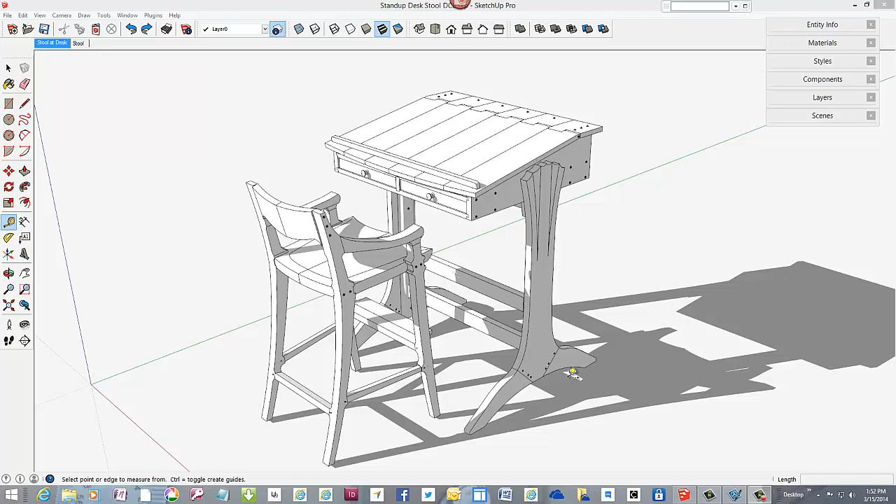I've finished construction of the stand-up desk and now need the stool to match. In this video, I'll show how I created the shaped back piece in the stool. This will involve standard SketchUp tools, including the line, arc, protractor, tape measure, and push-pull tools. Also, the intersect function is required since the back involves compound shapes.

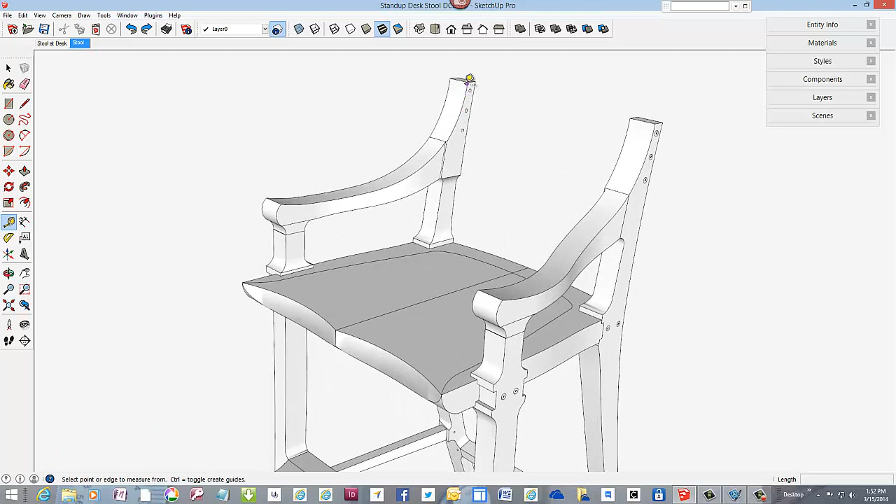Here is the stool in its basic unsculptured assembly, albeit without the back. On the upper section of the back leg, I'll place a guideline here, and this will be the front face of the back.

I need a perpendicular line to this guideline, so I've picked the protractor tool, rotate around to 90 degrees, and I've got a perpendicular line.

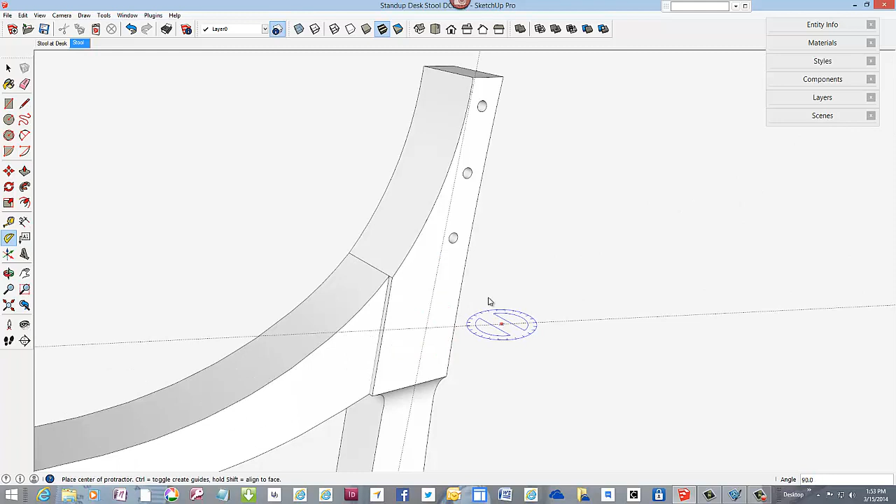Now I can place a line that is 2 inches long, which will represent the blank piece of lumber that I'm going to use to shape this back for this stool.

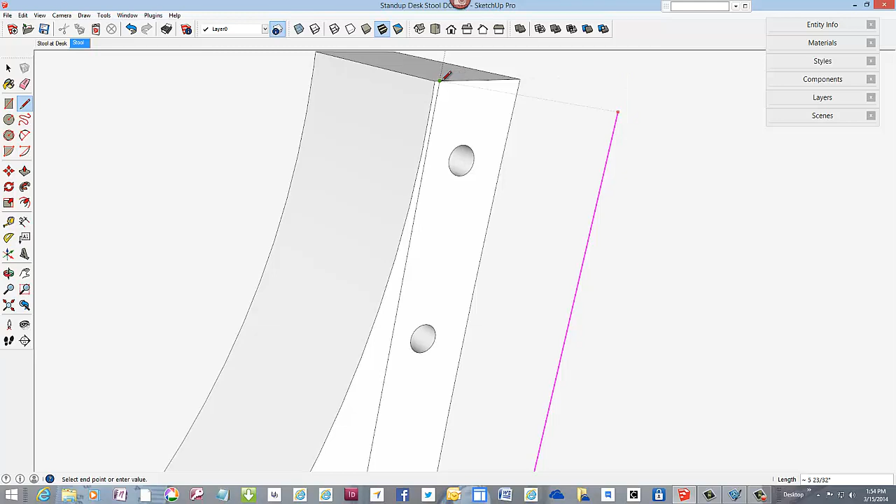To complete the rectangular shape of the end of this piece, I'll draw a line here that's parallel to the first line, and hold the shift key and come across and complete the top edge of that rectangle. This is the rough shape of the blank piece of wood that I will use the bandsaw to rough shape out.

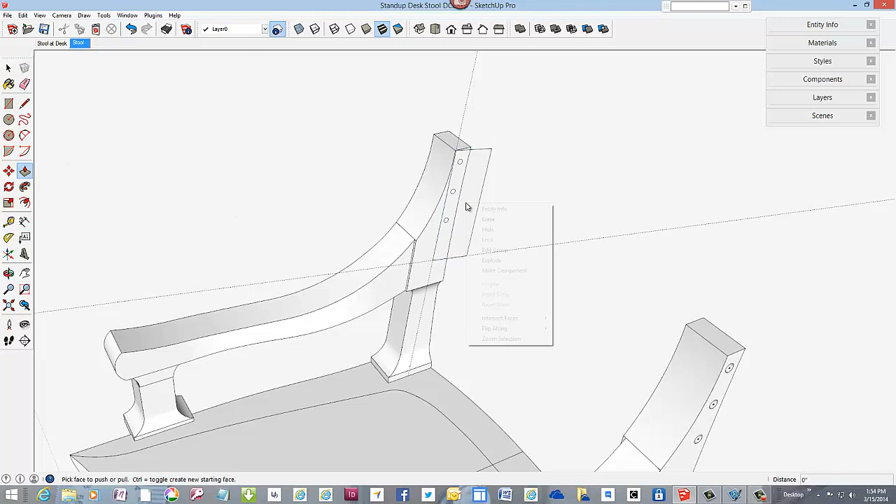I've made that a group, and we'll now pull that out to half length. Since this is the same shape on both halves here, we can just work with half the length.

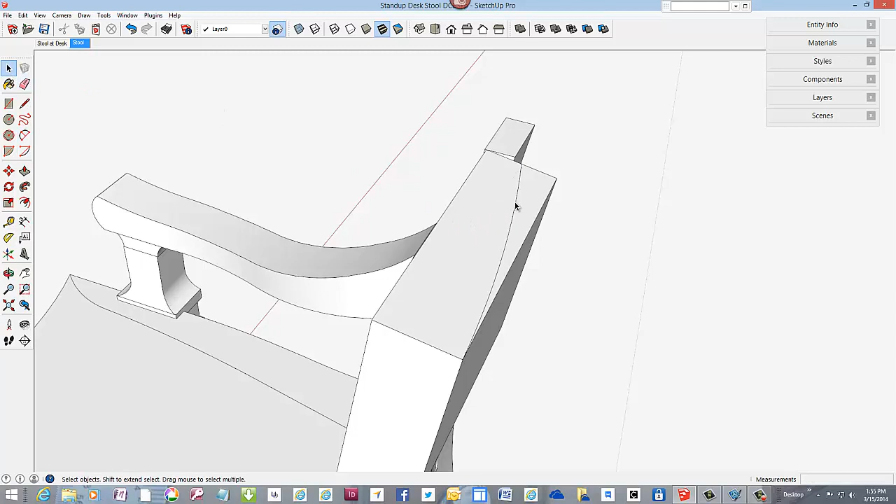It's symmetrical. The back has an arced back for comfort, so on this top surface I'll place an arc about like this, and then I'll bring a copy of that arc shape up to the front thickness.

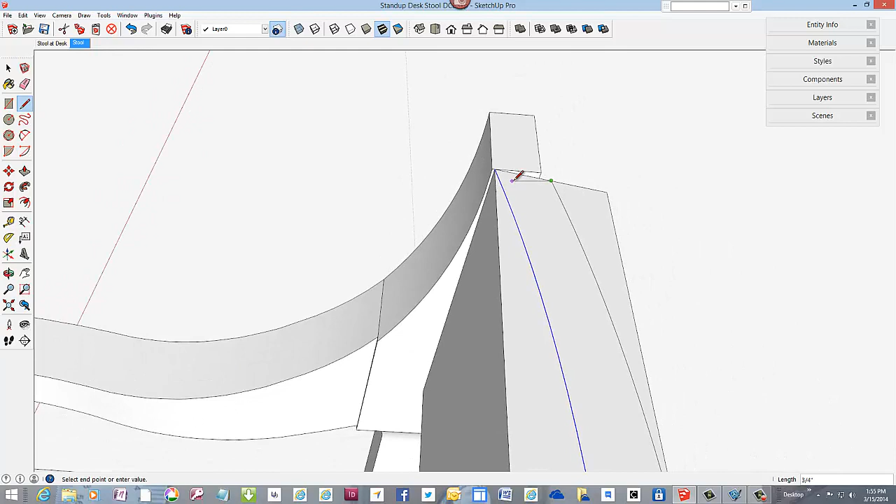The thickness is going to be about 3/4 inch for the back. I'm going to complete the shape of this arc shape and then double click and make that a group.

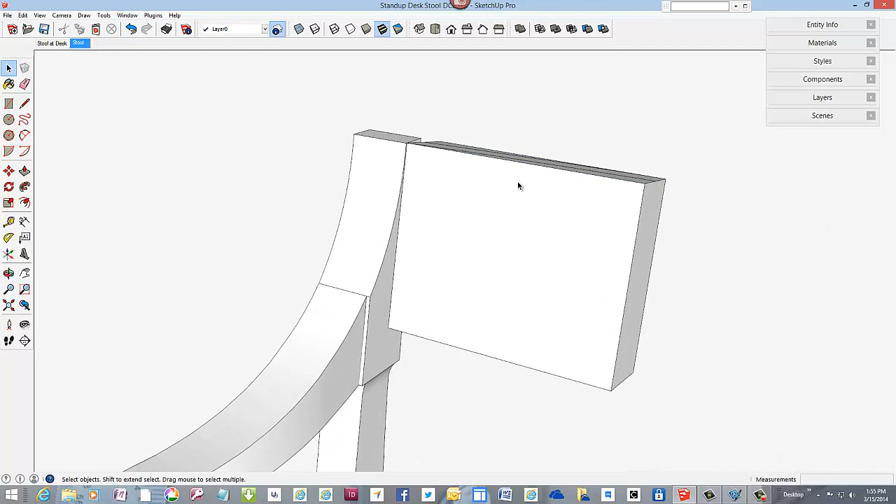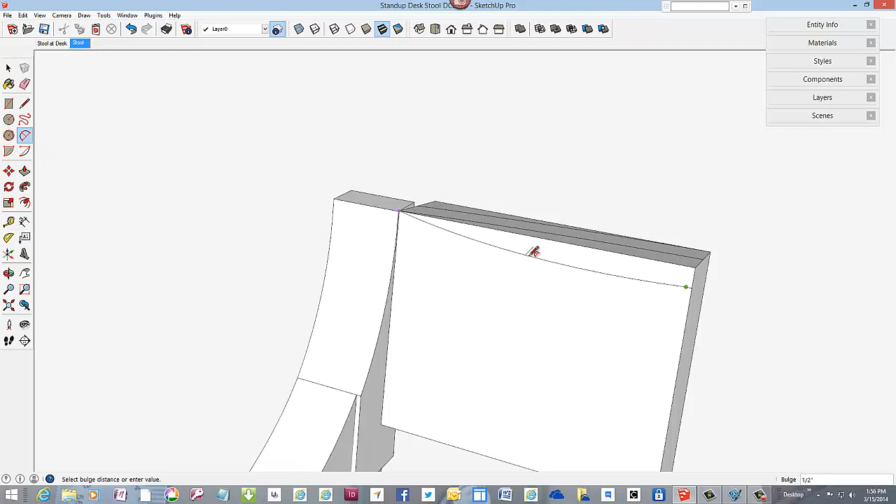There's another shape involved here. When you look at the front view of the back, there's a slight downward arc. I'm going to draw a little straight line here so that I can get a nice arc tool that shows the tangent, the cyan color that shows the tangent. That's what I want.

So there's a little dip in the top of the back, and there's a stronger arc coming up from the bottom, and it may take a few tries to get this to look right.

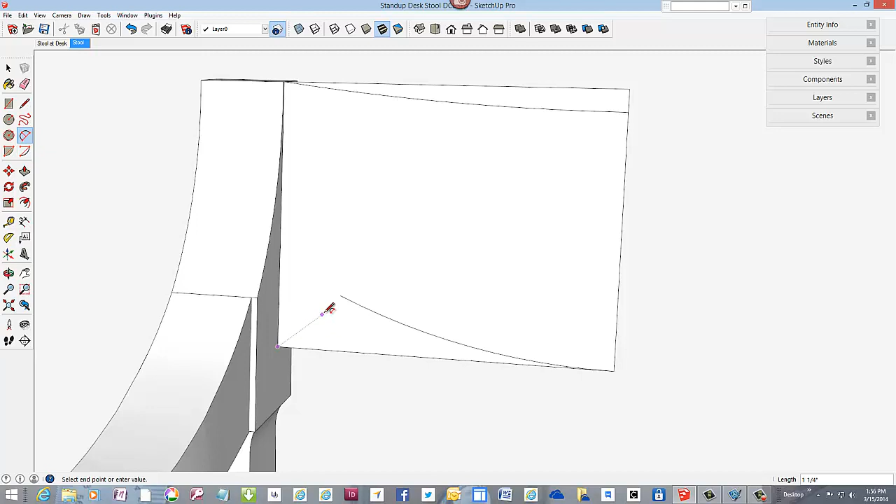So I'm going to put an arc about like this shape. It's a stronger arc, and then come around from the corner and intersect with that arc somewhere here. Let's see, yeah, that looked like it works pretty good.

I got the tangent. I can knock out this little extra edge. Looks good.

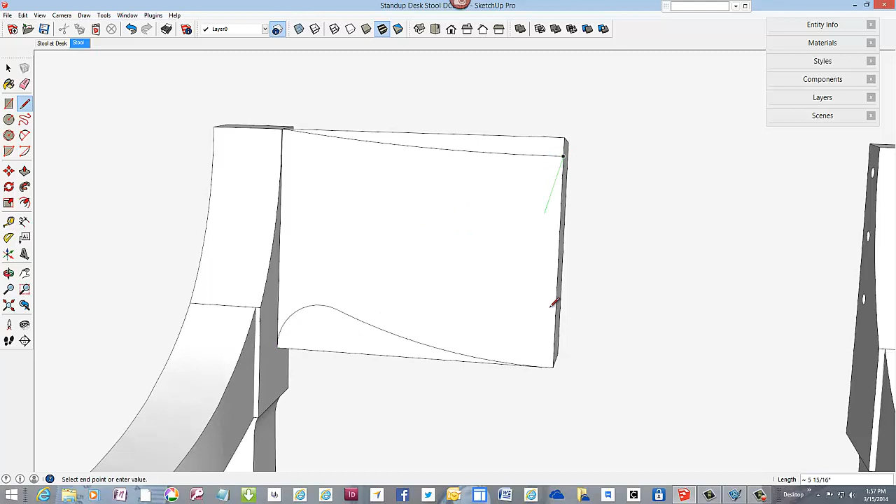Now I need to complete that shape of the front of the back by drawing some lines. And then again, I'll double click and make that shape a group.

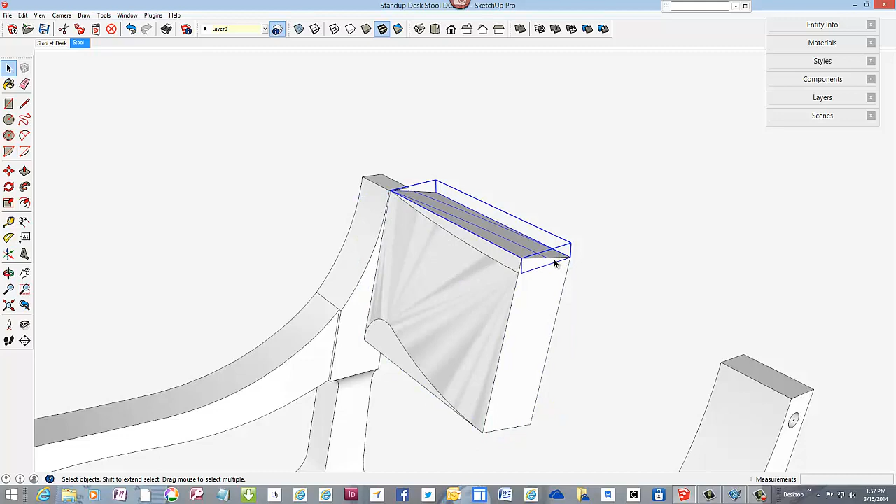So now we've got three groups actually. We had the first, the block shape, which is that one. Then we've got the arc shape here. Now I'm going to delete the first block that I don't need anymore.

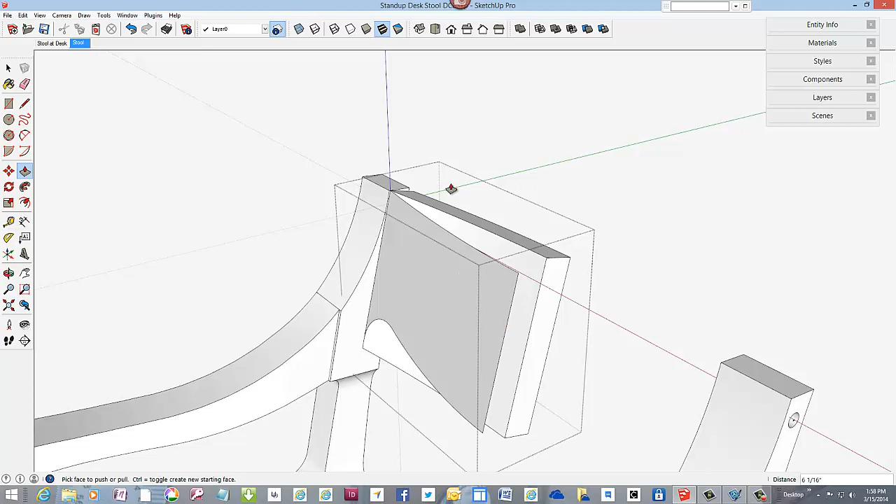With these two shapes, I should be able to get the final shape of the back. As you'll notice here, I'm getting ready to do an intersect of these two shapes, the vertical shape and then the horizontal shape, and I make sure they overlap.

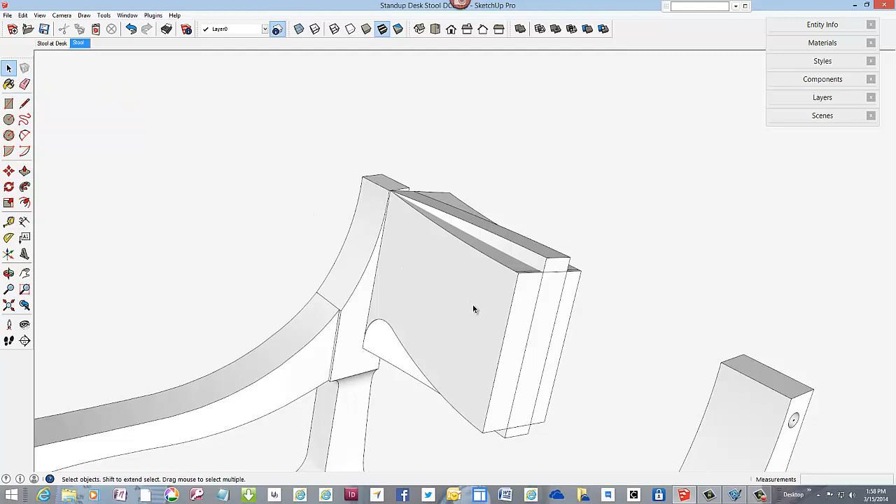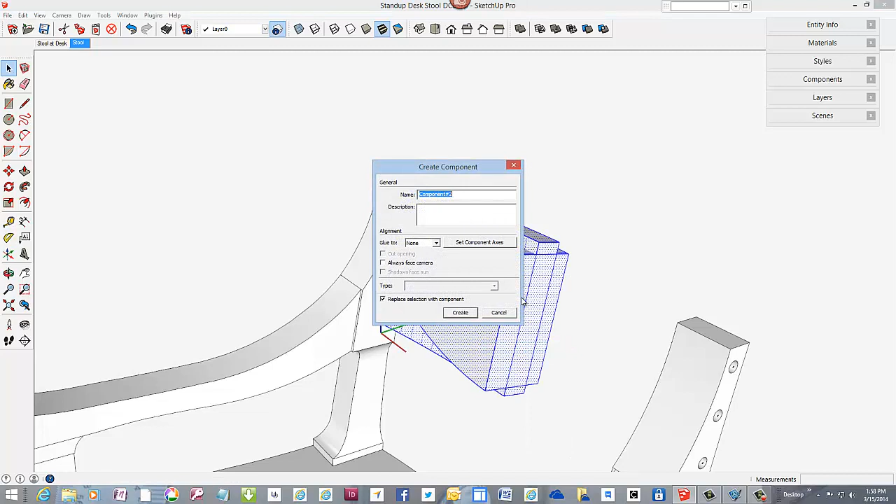Before I do the intersection, I will actually explode these two shapes. Right click, explode, and then right click, explode. And then I'll pick up all of those faces and make this a component called back new and create.

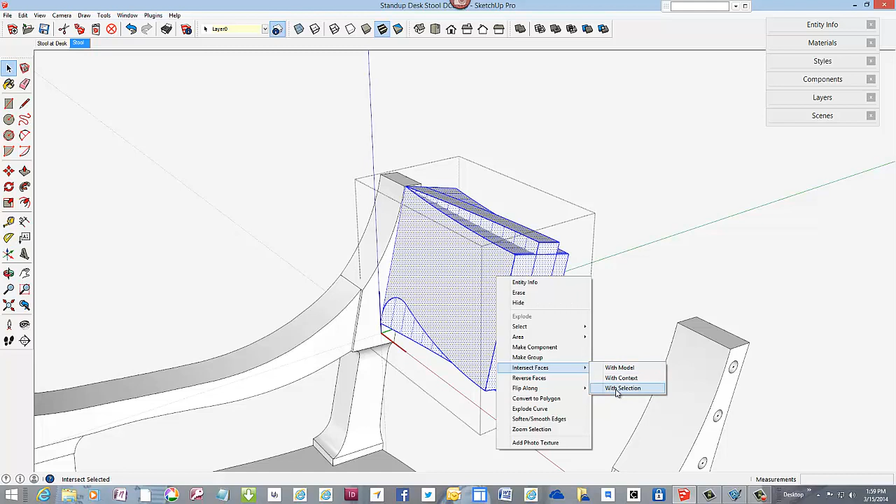So I've got this bundle within one component, and I'm going to edit the component, triple click or double click to get everything highlighted, and then intersect faces, and then the intersection is done, and I can start deleting waste at this point.

With the eraser tool, it goes pretty fast with this simple structure.

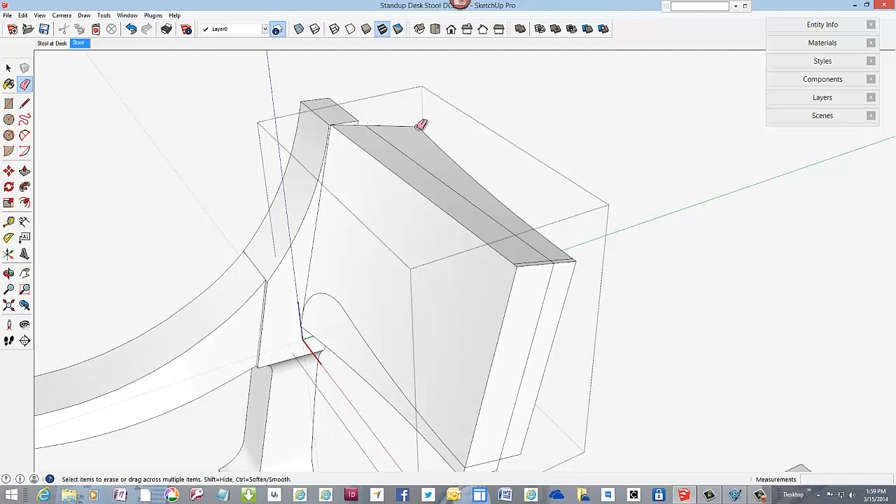Let's rotate around here and look at this. I probably shouldn't have deleted that edge. Probably have to come back, yeah, I've lost a little bit of the face. I'll come back and fix that in a minute. Delete out the rest of the waste.

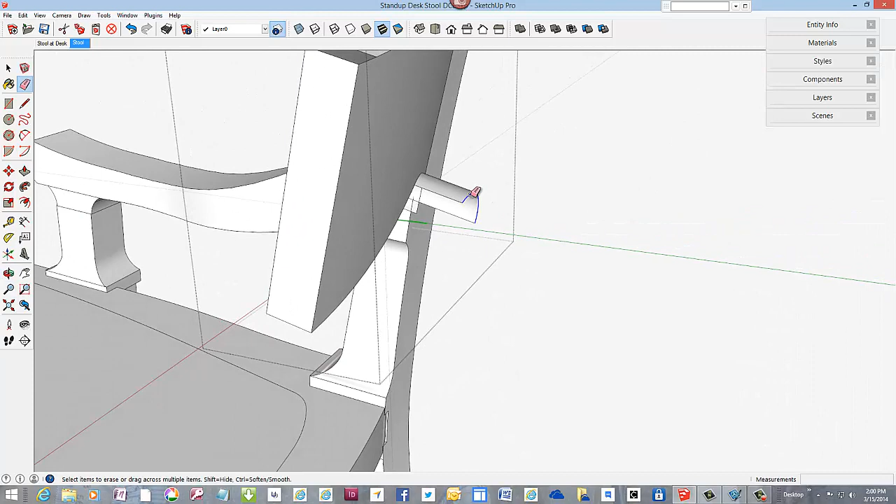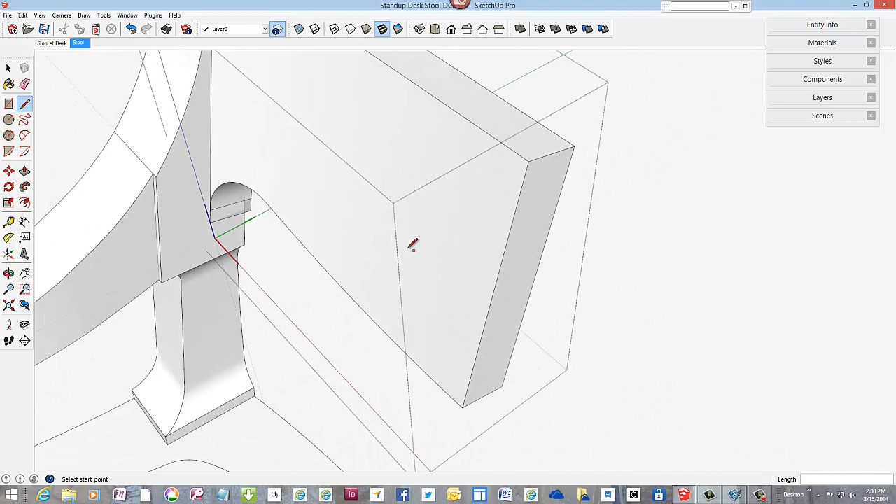Just look at this hole here that I created. Let me repair that face just with the line tool. I think, yeah, that's a straight line there. I'll just go ahead and trace over, and that closes up the face. Looks pretty good, although I see some more waste down here at the bottom.

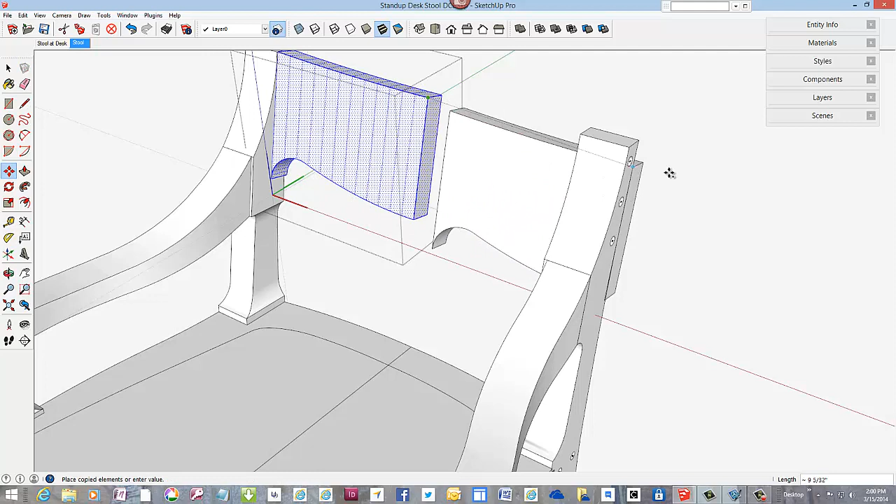We've got half the symmetrical component, and I can double click and pick the copy tool and copy that within the component. Now I've got this extra copy, flip it along the red axis and pull it in and match it up exactly.

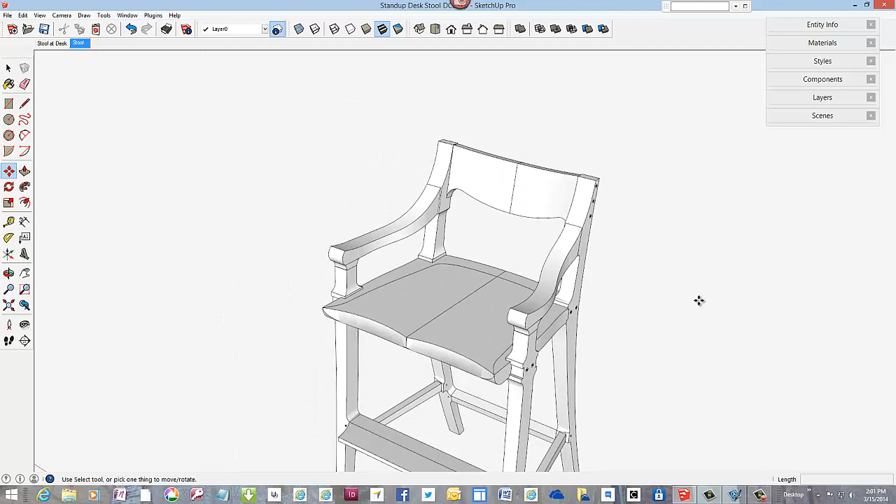And that's the completed rough. Of course, there'll be a lot of filing and sculpting with spoke shaves and other hand tools to get this worked out the way it should be.